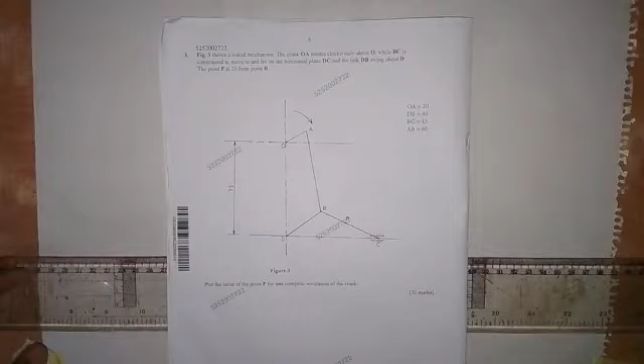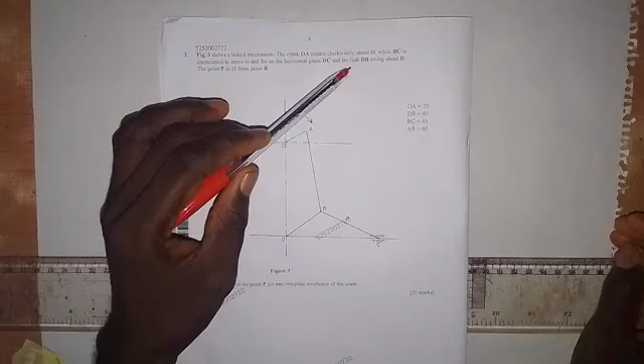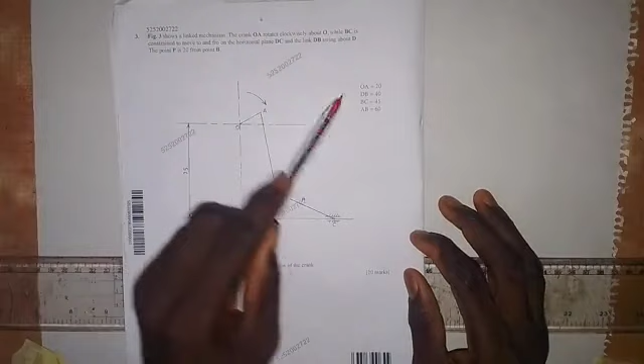Here we are working on question 3 of this year's 2025 November GCE. The question says figure 3 shows a linked mechanism. The crank OA rotates clockwise about O while BC is constrained to move to and fro on the horizontal plane DC, and the link BD swings about D. Point P is 20 from point B. We are asked to plot the locus of point P for one complete revolution of the crank. We have the dimensions to use: OA is 20, BD is 40, BC is 45, and AB is 60 millimeters.

We're going to make use of these given dimensions to work this out. The first thing we'll do is draw a vertical line. So let's draw a vertical center line first. I need some space here, so we draw the vertical center line like this. Center lines are drawn with thin long chain lines. Then I'll come up and draw a horizontal center line, so here we have it.

As we have it here, the distance between this center line and this center line is 75 millimeters. So I'll take a measurement of 75 millimeters down, and draw a horizontal line through this point, like this.

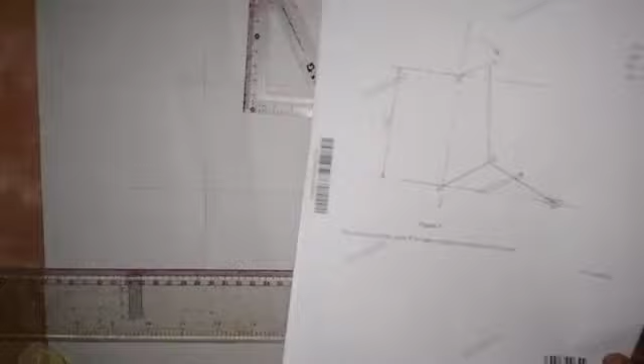Next, I'm going to draw a circle. For OA, which is a radius of 20 millimeters, I'll draw a circle of radius 20 millimeters. So putting the pinpoint of the compass here, I'll draw the circle like this.

This circle I'm going to divide into 12 equal parts, using the set square. We draw this line, then turn to this side and draw from here to here, and so on until the circle is divided into 12 equal parts as we have here.

Now I'm going to label these points. This particular point, according to the diagram, is point A, so I'll call it point 0. This is 1, this is 2, and since it's going clockwise, this is 3, 4, 5, 6, 7, 8, 9, 10, and 11 as we have it here.

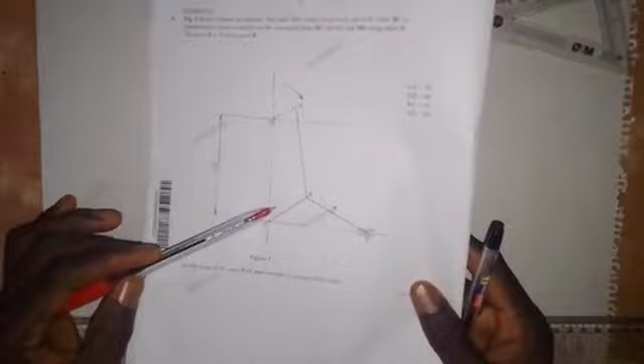Now let's see the next thing we need to do: work on BD. BD is going to be an arc, or we could make it a circle of radius 40 millimeters, since we're told BD is 40 millimeters. But since it's swinging, I'll make it an arc.

So we take a measurement of 40 millimeters here. This is where we'll have point D. Then I draw an arc like this, so we have the arc BD here.

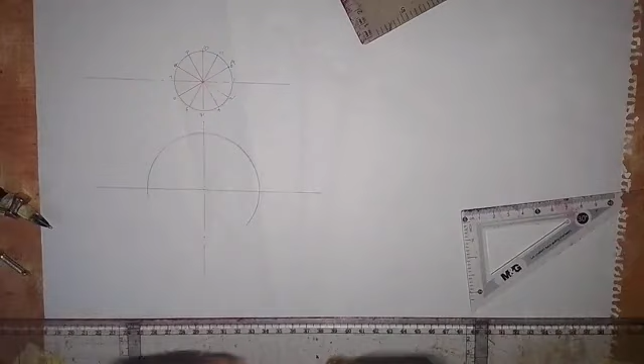Now the next thing is to locate point B on this arc. Since we're told AB is 60 millimeters, we take a measurement of 60 millimeters, put the pinpoint here on A, and make an arc crossing this arc. So here we have point B, and this point is point D.

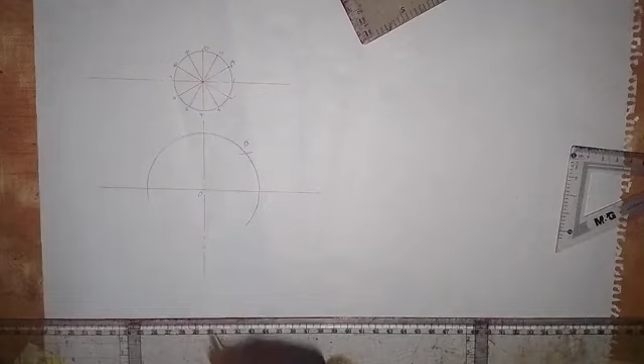Now let's see what's next. Which data have we not used yet? We haven't used BC, which is 45 millimeters. So we take the compass and measure 45 millimeters, put the pinpoint here, and make an arc on this straight line. Here is point C.

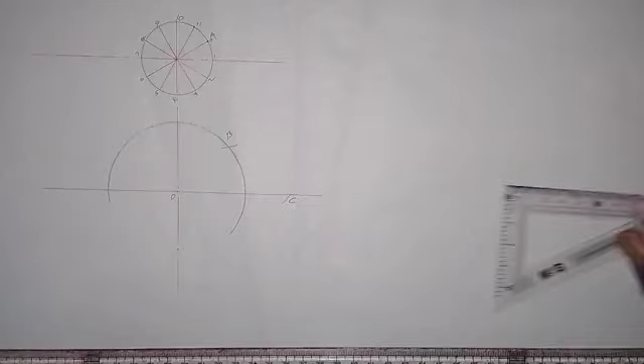All right, so we have C at this point. So what we have to do now is join AB together with a straight line, making it a thick line, and also BD from here to here, also a thick line. Then we also have BC, which we make a thick line like this.

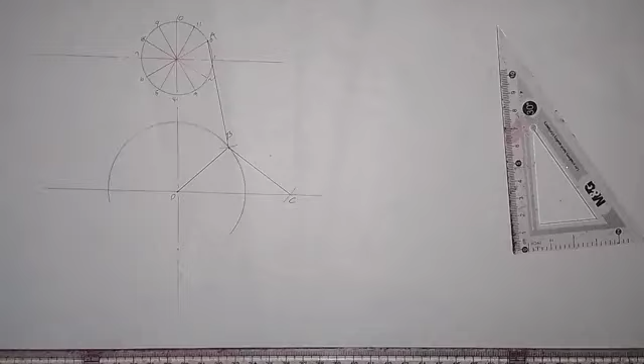We are told in the question that P is 20 millimeters from B. So let's locate point P by taking a measurement of 20 millimeters from B. So this point here is point P.

All right, let's work on the rest of what we have to do. We need to get other points P as we move. That's 60 that we have for AB, and we need to retain it.

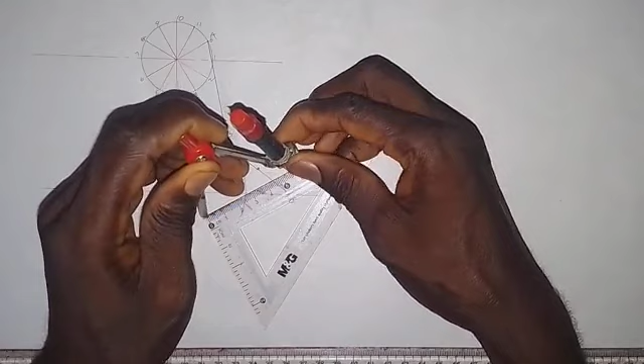So this is going to take some time. We take that 60, putting it at point 1, since we started from 0. We put it at point 1 now on this arc, and we make another arc like this. This is the next point B. So then we are going to draw a line from point 1.

I draw a thin line from point 1 like this, usually using my red pen for that. Then I'll take 45 again. This will take some time, but we take 45, putting the pinpoint here, and we make an arc on this line.

So this is the next point C. We draw a line from this point to this point, joining them together. We now take a measurement of 20 millimeters from this new point B to get the next point P. So we have this point.

Let's see the next thing we are going to do. We take 60 millimeters again, putting the pinpoint here at 2, then we make an arc on this arc here. So this is the new point B.

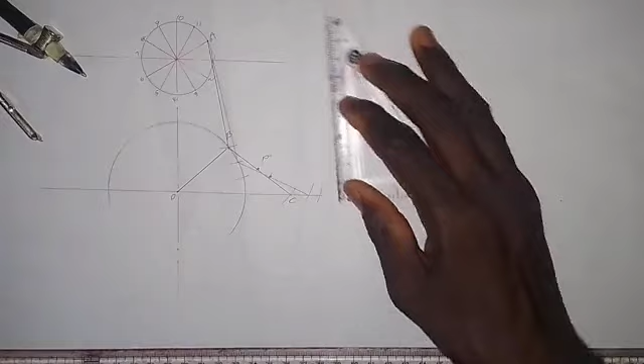All I have to do now is join this point 2 together with new point B, using a thin line. Then I'm going to join this point together with new point C. Do it one by one as I'm doing here - if you try to get all of point B and point C and join them together, there'll be an issue. Just take it one by one, this is the right way to do it.

So this is the new point P. We have the new point P here. Let's do one more before I pause the video.

We take 60 millimeters again, putting the pinpoint at 3, and I make an arc here at this point. Then I will take 45 again, putting it at this point, and make an arc on this line. So here we have this now.

I'm going to join these two points, that is B and new B, and C, together with a straight line - I should have used a red pen for that - and then also join this together. You're expected to draw all these lines, so take note of that.

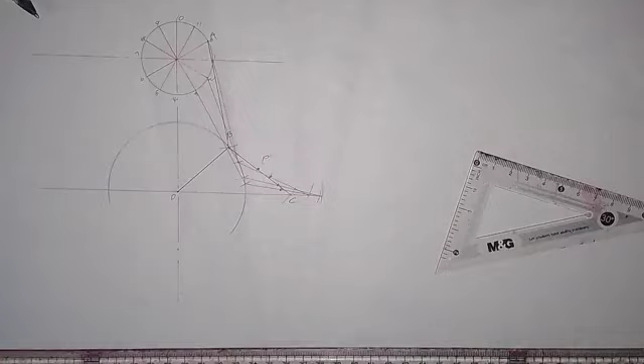Now I will take a measurement of 20 millimeters from this new point B. So we have this point now. I'll pause the video and do the rest, and when I'm done I will come back so we can draw the curve - that is the locus of point P.

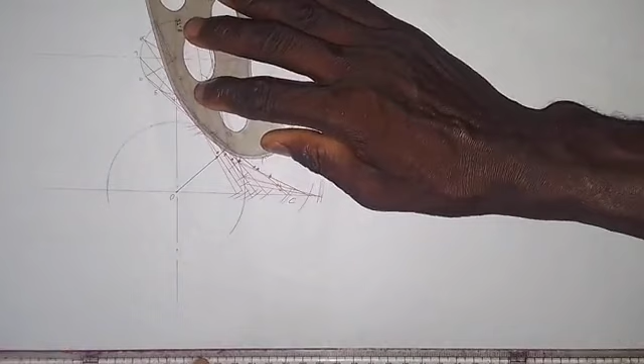All right, so we have the point here. This is what we got. Looking at this, I don't know how this curve is going to be, but I'll just manage to join them. Looking at this, it's somehow an unpleasant curve.

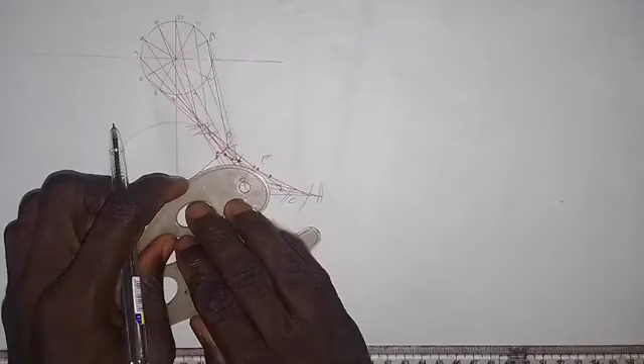All right, so we're just joining. I can join this together like this, and then this one, and then I'll join this together. So you will not really see the curve fully, but this is what I got. It's as simple as I've done it here. So thank you and God bless you.